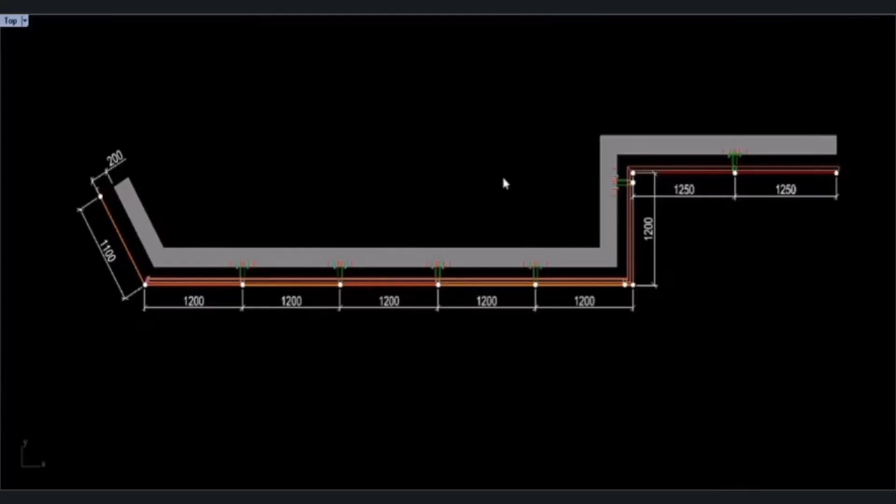In this video, we will show how to draw facade composite sheets and how to perform shop drawings by using the PARDUS program. Let's imagine this white line that has been measured with green is the facade of the project, located at a 200 millimeter distance from the reinforced concrete surface.

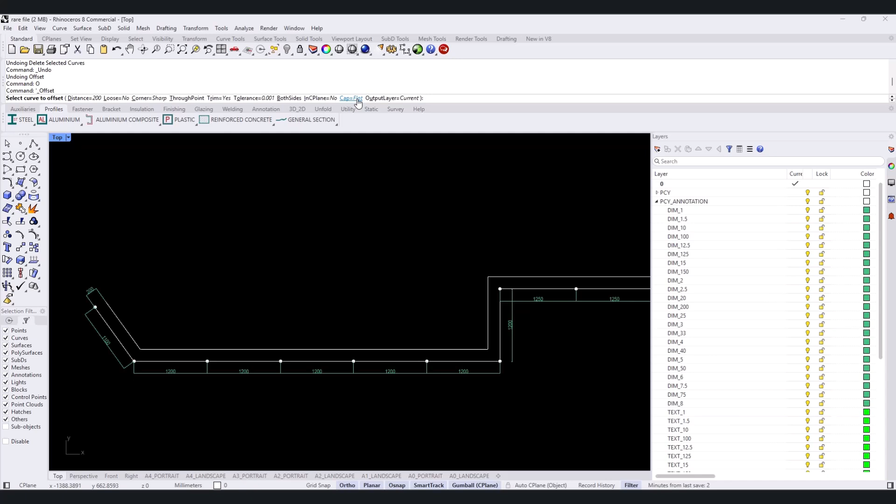First of all, by using the offset command, I start to draw the concrete surface. As previously mentioned, set the offset to 200 millimeters. Pay attention to the command line that the cap option is set to flat. By this, the start and end of the drawing will be closed automatically.

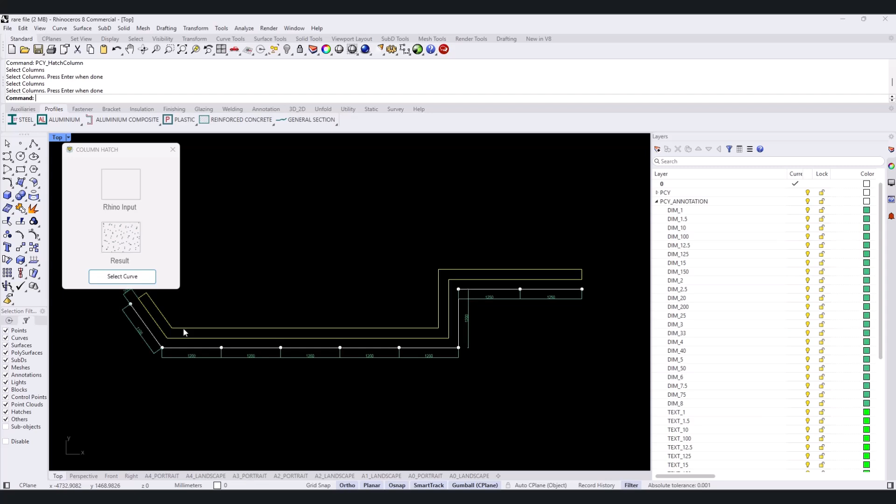Then, from the tab, choose the profiles and then reinforced concrete. And after selecting curve, I convert the drawing to a reinforced concrete surface. Here, with the polyline command, I start to draw composite sheets and the gaps between them.

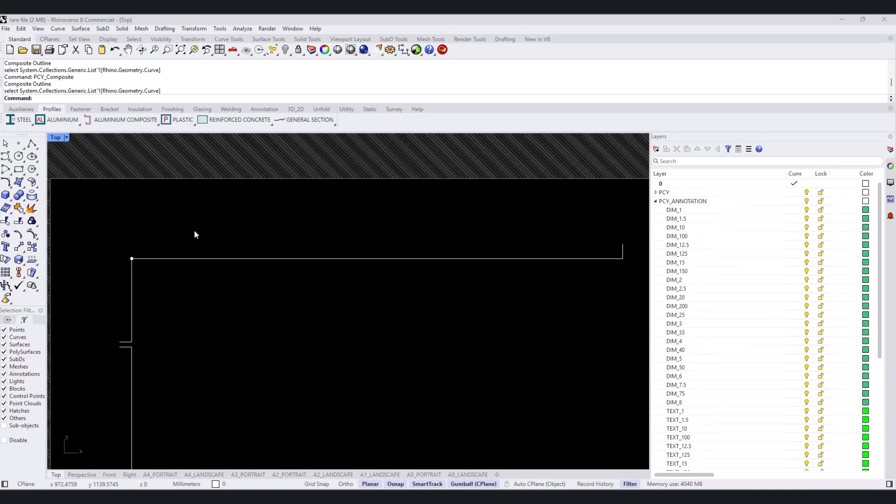After drawing the panel lines, select the aluminum composite panel option from Profiles, and by selecting Curve, convert the lines to the composite panel easily with just one click. If the panel is not in the right place, move it using the Flip option.

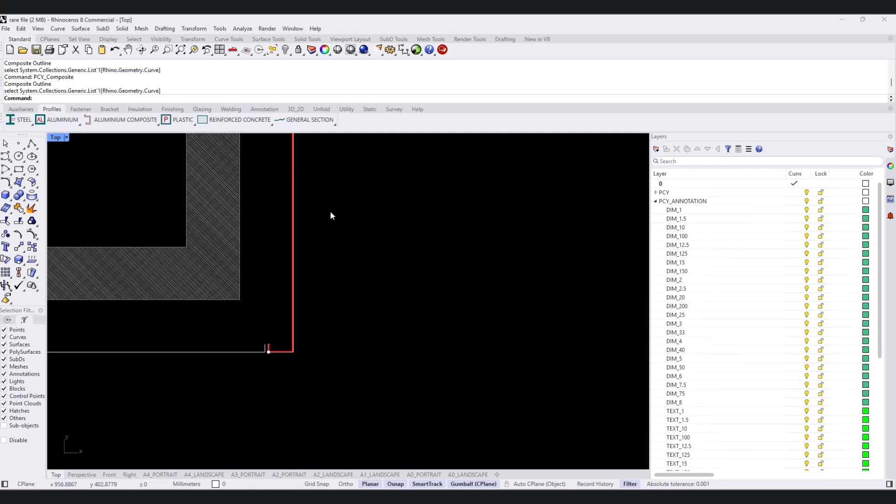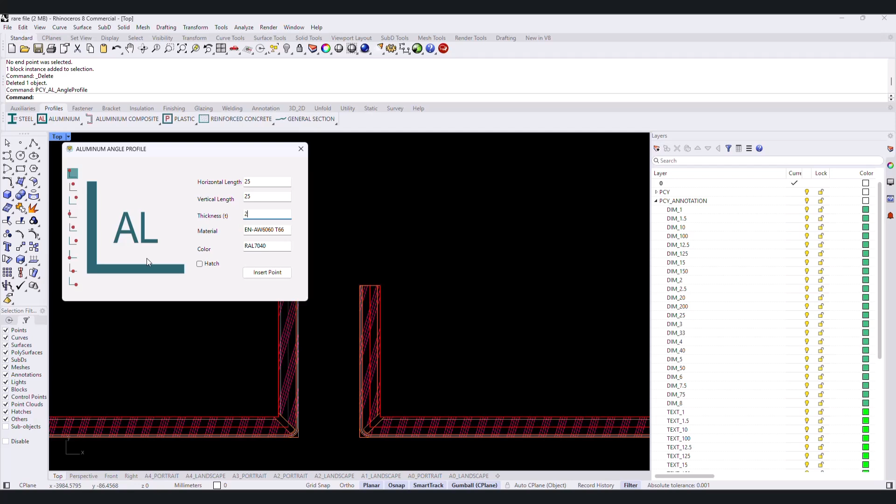Now, for covering the open space above the gaps, select the Aluminum option from the Profiles section and then the Aluminum Angle Profiles option. By entering the necessary values, such as the length of the profile wings and its thickness, finally click the Insert point and place the profile in the desired location.

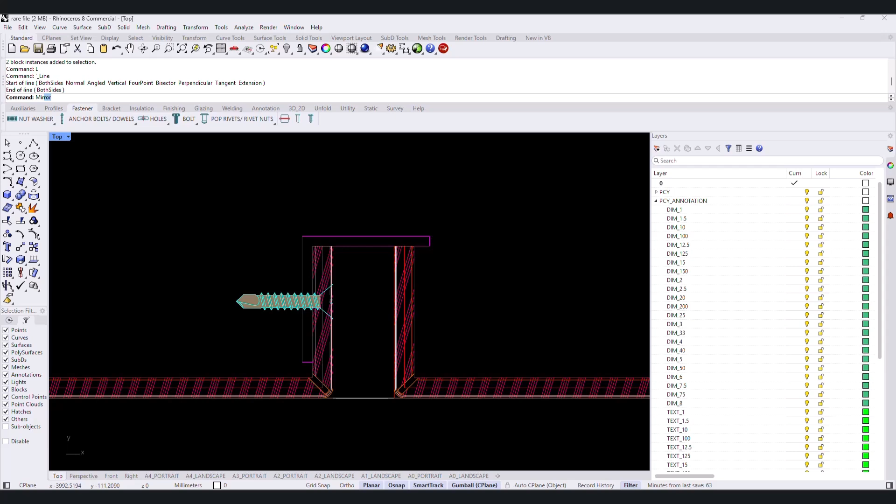To fasten and connect the profile to the composite panel, from the Fastener section select the desired screw and after clicking on Insert point, specify the location of the screw and finally click Create. You can use Mirror to draw the same connection on the opposite side.

Now, from the Insulation section and then Silicon, I select the Joint Silicon option to fill the empty space between the two composite wings. After entering the silicon thickness values according to the guide figure, finish the drawing with 4 clicks.

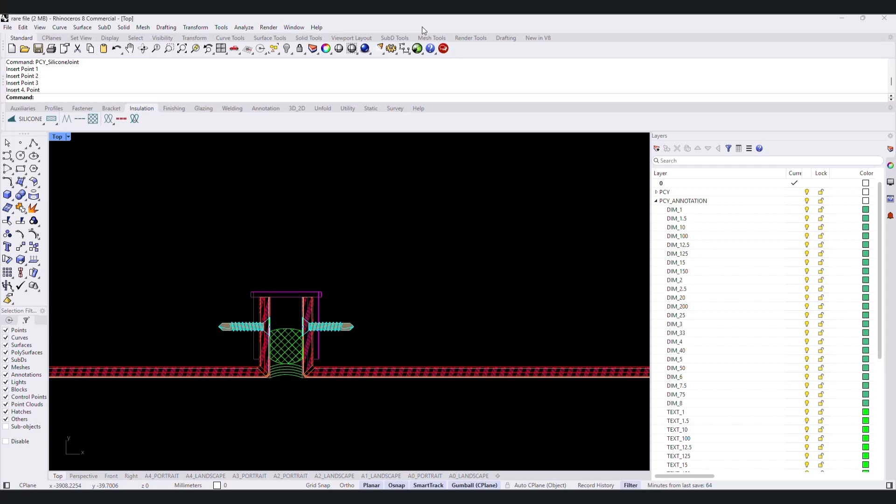Now, to draw the steel box section behind the composite, from the Profile section and then Steel, select the Steel Rectangular Hollow Section option. Based on the detail, enter the necessary values and select the Hatch option, then finally draw the box section with the Insert point.

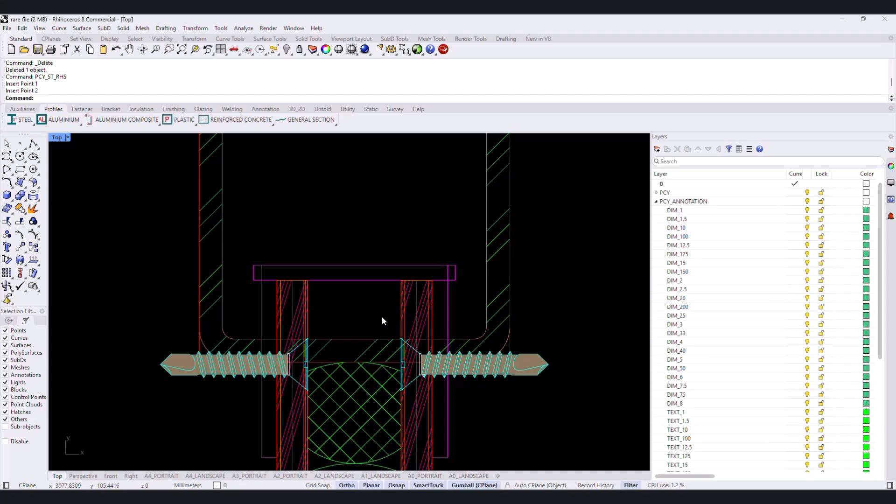If the details are somewhat complete, use the Group command to merge the drawings together and copy them to the necessary locations to speed up the process.

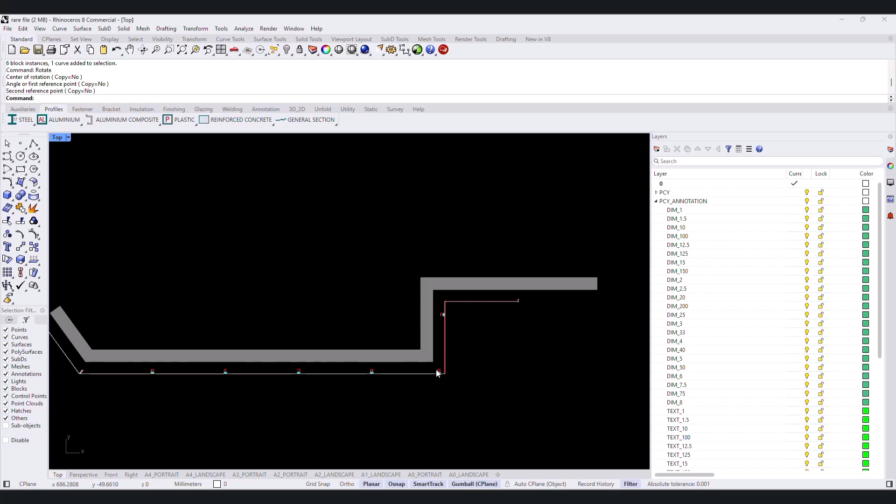Now it's time to draw the box profiles between them. For this purpose, from the Profile section and then Steel, select the Top View of Steel Profile. Based on the detail, enter the amounts and thickness, and also select the location of the profile axes, and draw the boxes with just 2 clicks at the beginning and end of the work.

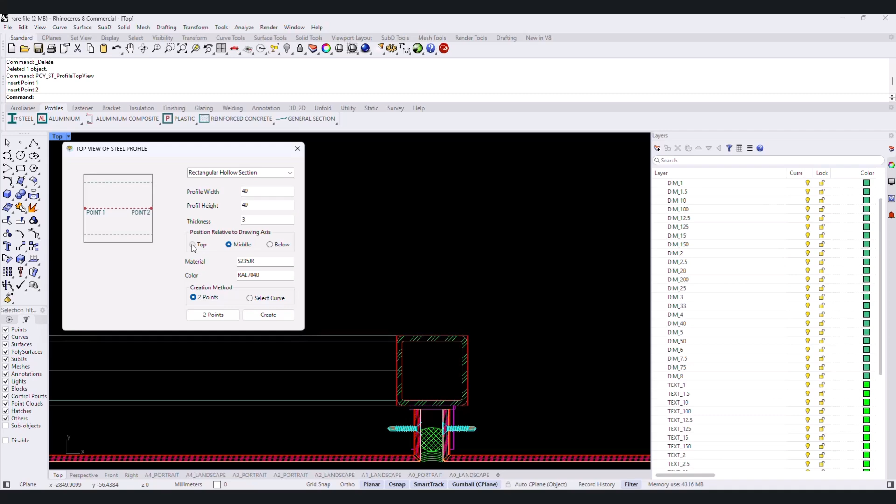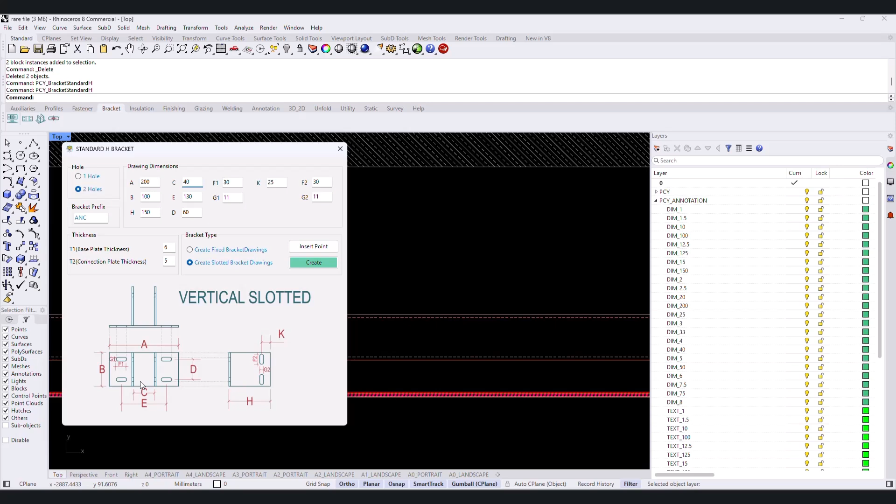Now, to draw the bracket, from the Bracket tab, then Standard H bracket, I enter the bracket drawing settings and options. As you can see, there are many settings such as distance between the holes, plate thickness, holes diameter, plate length and width, plate height and more.

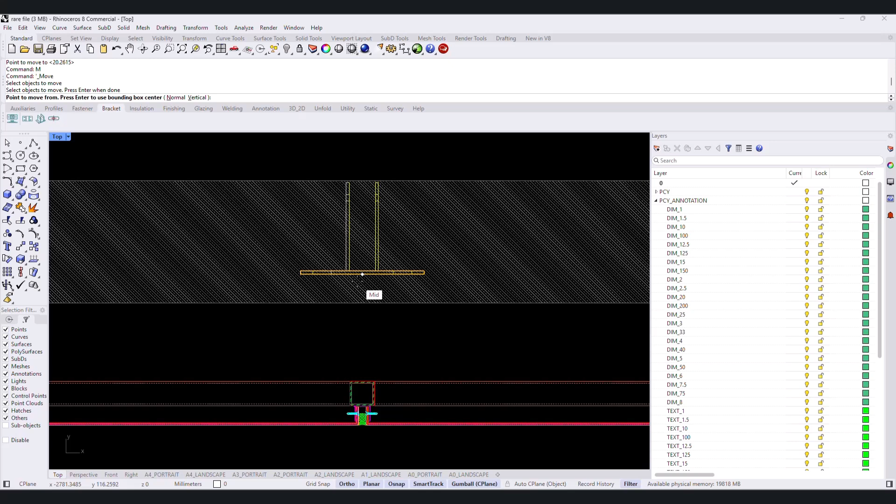After entering the required amounts according to the detail, by clicking on the Insert point and then Create, we will have the created bracket in 3 modes: Plan, Section and Elevation, where in this section the Plan mode is required. Then, by a little move, put it in its correct place.

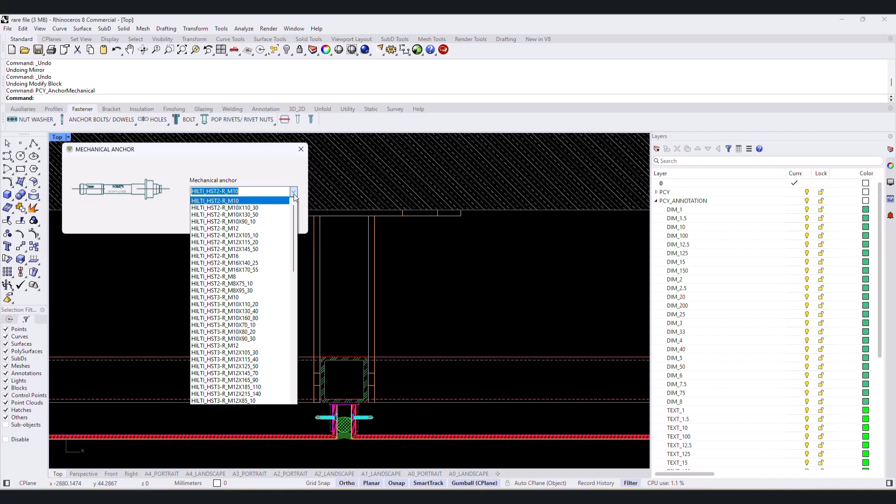For connecting the bracket to the concrete, from the Fastener tab, then Anchor Bolts, and then Standard Mechanical Anchor Bolt, select the desired anchor from the available examples and click on Insert Point. Then place it in the correct location and finish the job with the mirror or copy command. And also, this detail can be drawn by blocking or grouping command in any part of the project.

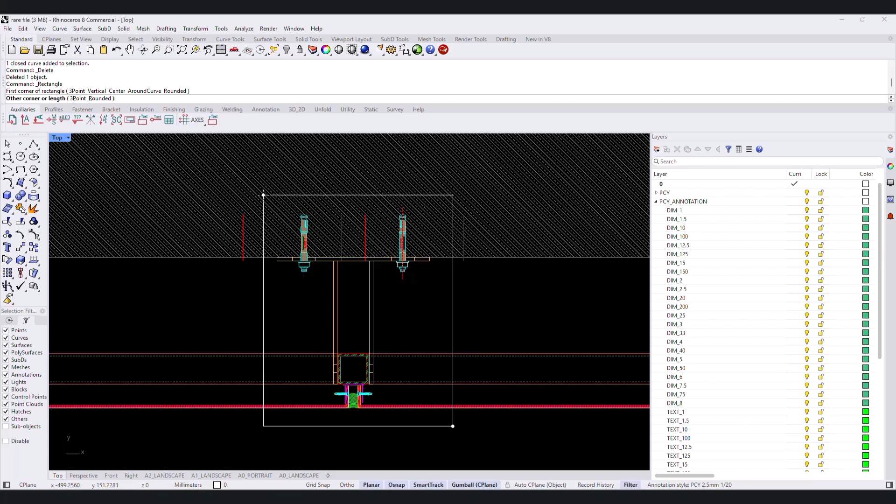To define the required area of the detail, use a rectangle. Then navigate to the Auxiliaries tab and select the Define Detail View option. Click on Detail Area and select the previously drawn rectangle. Based on the requirements from Layouts, choose A2 Landscape and draw the target rectangle within this layout. Next, select Printable Area. Then click on the rectangle. And finally select Create to generate the detail view.

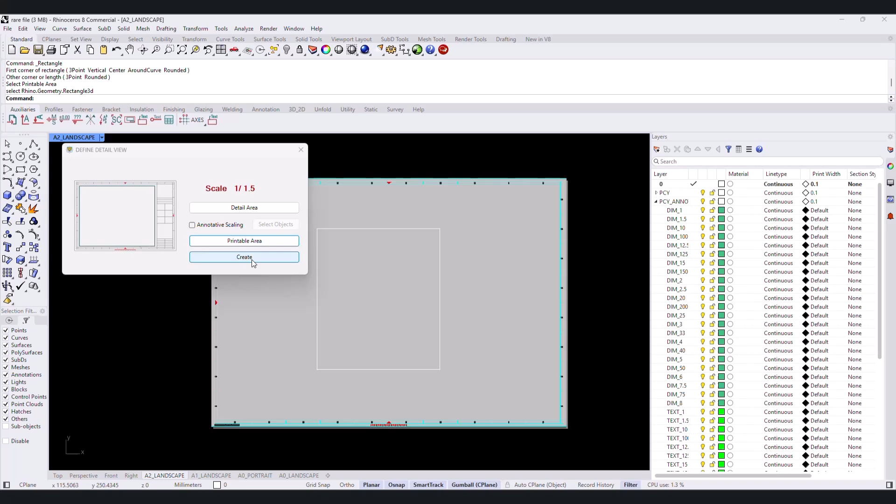Now I want to tag the details in this section using Annotation, and then Materials and Block Tags. I choose one of the 3 available languages, then select the drawing scale from the available values and run the command with a single click on the select block. Then on the details, by clicking on each subject, PARDUS automatically performs the tagging very clearly and elegantly.